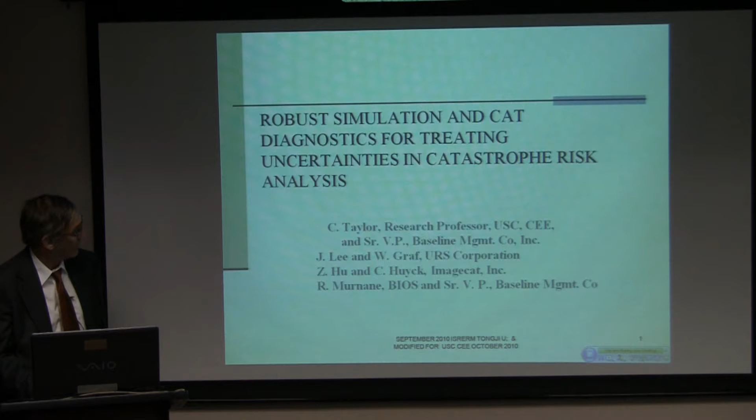So I wasn't unhappy about giving this lecture here because this is actually different. I didn't even think of this until a couple of years ago, and the reason it started was a question asked by Professor Trifunac many years ago. Let's see, how do I go up and down? Oh, here it is. Okay. The outline is, first of all, I'm going to define robust simulation. Secondly, challenges in selecting preferred and alternative catastrophe risk models, challenges to robust simulation itself, lessons from China, and then a summary.

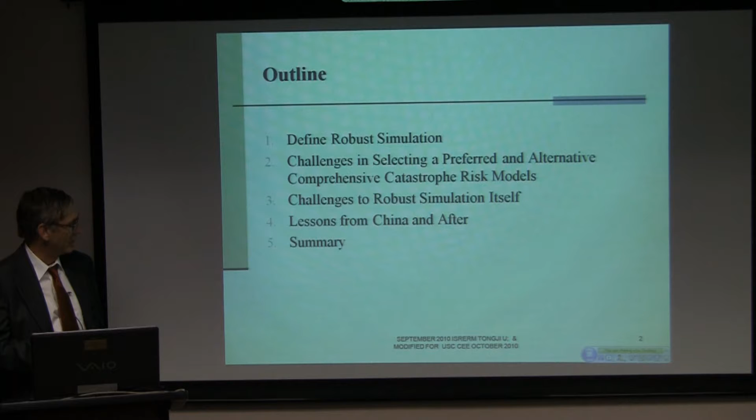But the question was raised by Professor Trifunac back in 2000, and he may not have phrased it this way, but I gave a presentation on how to define uncertainties given model uncertainties that you run through a big simulation program. If I had to redo it, I'd give a slightly different presentation, but it would be somewhat similar. And then he asked at the end of it, and you have to watch out for questions from Professor Trifunac, how do I account for what I call exogenous, this fancy term, alternative view models and views. And this has become a really prominent issue in earthquake and hurricane and other areas.

Is that the question you asked 10 years ago? I don't remember. I might ask you something else. For a primitive mind, could you clearly define the terms endogenous and exogenous?

Oh, endogenous just means that when you do a catastrophe risk model, which includes a lot of submodels, like exposure and hazard or peril, vulnerability, systems, macroeconomic, then you look at alternatives, so you can find out the best alternatives. You have a decision criteria and all of this. In these, you have submodels as well, and you can have an uncertainty.

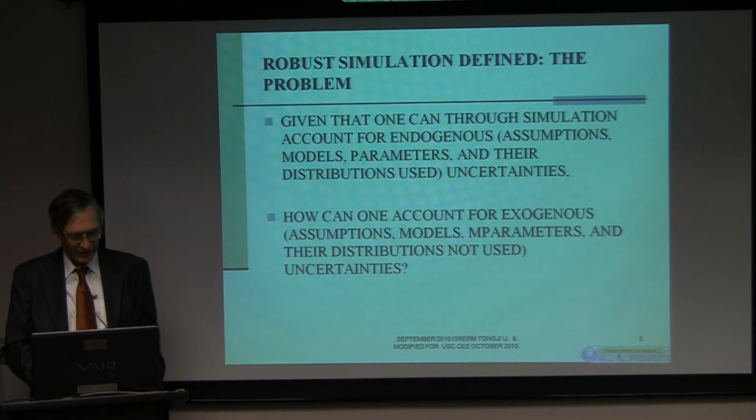So robust simulation employs simulation procedures. We're only talking about simulation. I'm not venturing into testing, which is a different story, to develop loss and gain distributions for a preferred model, that's the one I like, or you like, and coherent competitive models for the range of outcomes. And this range is developed to indicate uncertainties in what is currently known. This is a completely different view of uncertainty analysis, and I'll tell you why it arose in just a second.

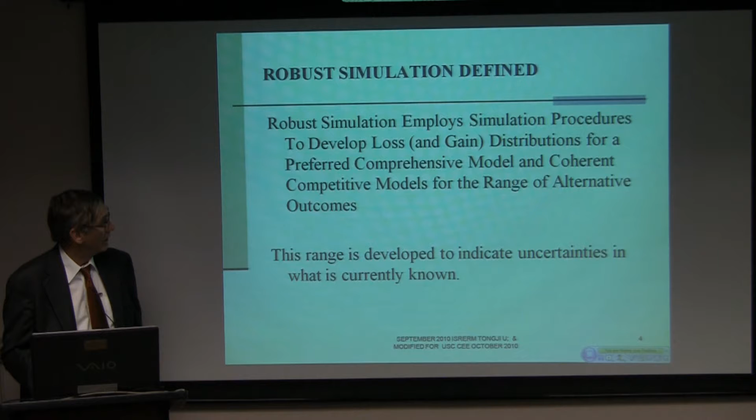So this kind of practice: I have a close friend, John Collins, who got an engineering mechanics PhD from UCLA, but he's now 75. He runs a big company of 60 people, largely PhDs. And they do missile risk analysis on all kinds of fancy things, and they do something like that in their procedures.

We had a presentation from Robert Lempert of RAND on how he did 100-year policy analysis, and he did the same thing. They used robust ensembles, is his expression, to get uncertainty. Can you imagine figuring out what's going to happen in 100 years? So climate change, climate conditioning, alternative insurance, reinsurance models for catastrophe.

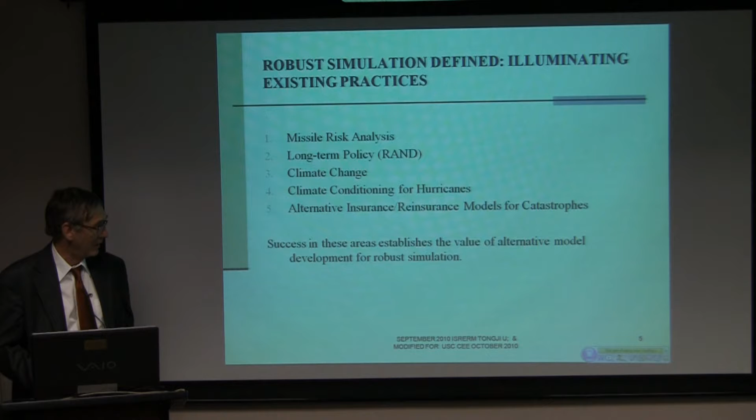And I have Rick Murnane, I mentioned in the first slide. He does a lot of work with MIT and Florida State on a lot of these issues. He's going to give a presentation in Zurich next year on the same topic for hurricanes. In California, we don't know hurricanes very well.

Okay. So here's the kind of model you're constantly seeing in terms of climate change, hurricanes, and so on. The results of the models are not precise outcomes. The results are a combination of outcomes from different modelers, and that's what is often presented as a result. This is from Kerry Emanuel of MIT. We could go over what it is, but you see the same thing on all kinds of diagrams in climate change.

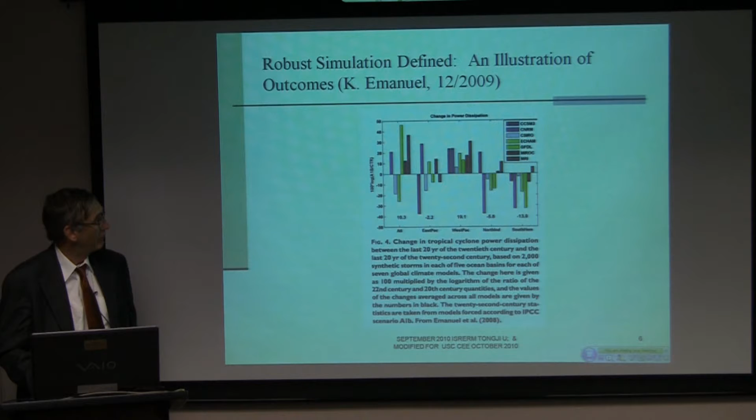And what this does is it starts to reorient our view of how one should think about what one is doing. Instead of having a monopolistic view of what one is doing, which is a good thing to have, by the way, it's a good thing to want to be the best, you should have a competitive view that while you're doing something here at USC, somebody else at Stanford is doing something else, maybe along the same lines, and somebody at Texas is doing something else. And it's good to have this kind of competition in science. So you have a competitive model as well as a monopolistic model of science and engineering.

And you have to have the wherewithal or resources to handle this model. So we're talking about really important areas. Earthquake tends to be one of those areas when there are national building codes and so on involved. So it's a very different view of science.

So these are the sub-models you have. Exposure, they all cause problems. Peril sources, peril propagation, path and distribution, facility vulnerabilities or fragilities, system vulnerabilities, macroeconomic outputs, decision procedures, stakeholder results. Each of these causes problems. You can have specialists on some subtopic for peril sources, and so on. And as things have developed over the past 40 years, the number of participants in this process has increased immensely.

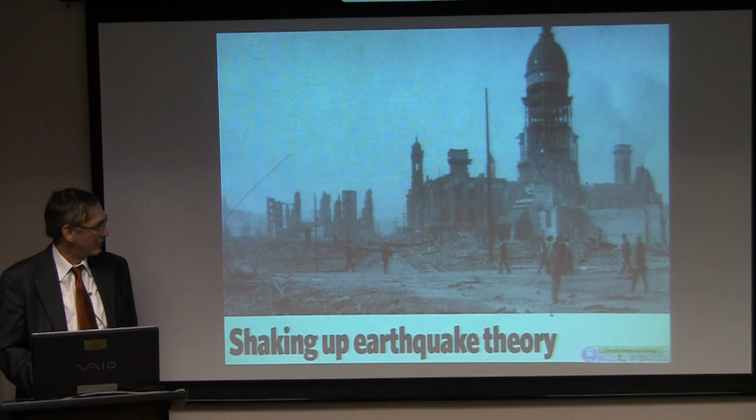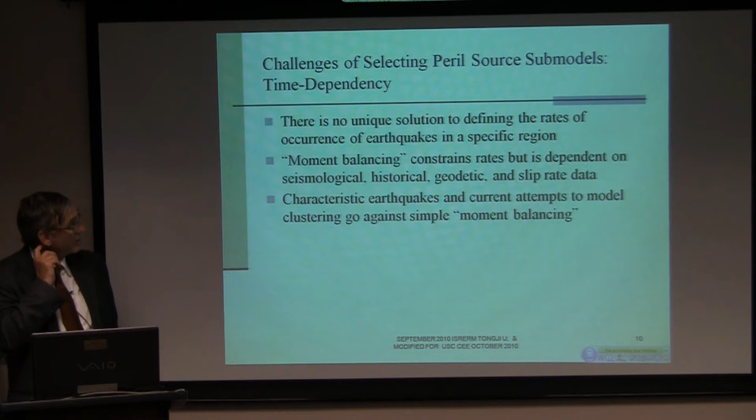So what is true about these models, and what makes it fit something like robust simulation, is there's no unique solution for defining rates of occurrence of earthquakes. There are lots of ways one can do it. One can do this or that or this or that. You can come up with a lot of different solutions on it.

Moment balancing, I used to really like this, but the more I think about it, moment balancing means that you've kind of got an energy budget. I think Professor Trifunac was using this back in 1985, something like it. But I used to like it because then people couldn't just throw in a big earthquake or increase the maximum magnitude of an earthquake without having it impact the whole regional system.

But with moment balancing, you've got three different theories of time involved in earthquakes. You've got clustering, which is being studied a lot now, where one earthquake causes another nearby. You have a cyclic behavior. Some people believe in what they call a characteristic earthquake theory, which is the earthquake occurs now and then its return interval is approximately 250 years.

And then you have a much more random theory, which comes out of UCLA, that you just have the so-called Gutenberg-Richter law that dominates everything, so everything's kind of random with some association of faults. These models are going to be discussed for a long time. One's not going to win easily.

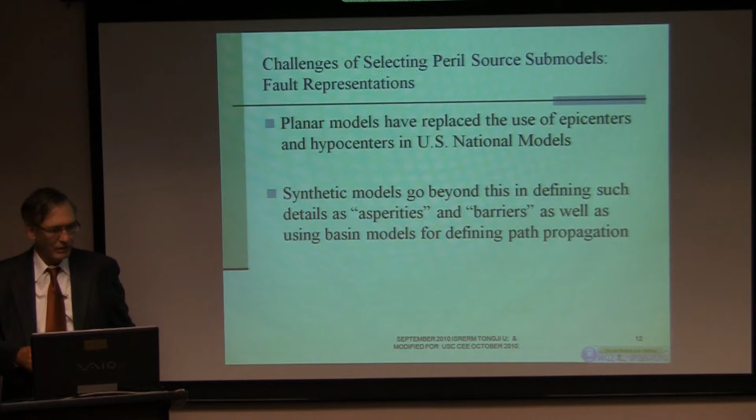Dynamics involve whether there are permanent barriers or not, and if the rupture goes through permanent barriers, does it go straight, follow the old mature fault, or does it go a little bit to 30 degrees or whatever? And this comes from Maria. There's no unique solution in defining the best synthetic model, and we'll see that in just a second. So what we have is a situation where we don't have unique models. We have different models. You have to have, as I say, resources to model these.

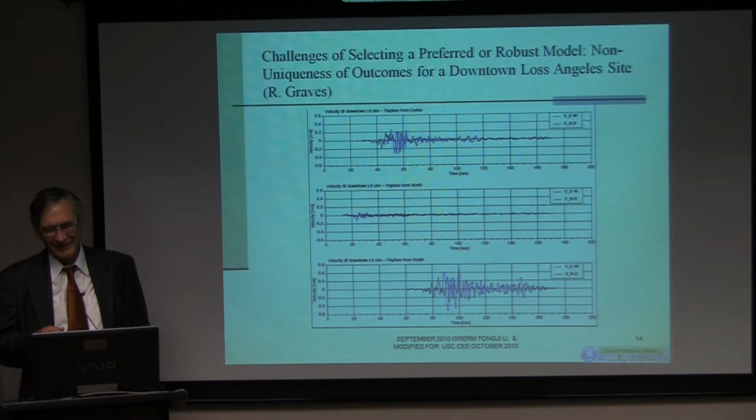Now, which one did they use in ShakeOut? Can anyone guess? You should know this. The structural engineers don't always like the results that come out. Always pick the biggest. Yes, thank you. Very good.

Okay. So next generation models have been developed by seasoned investigators given one database. There's a big database of maybe 3,500 records. But the probability given this database, all this evidence, did not yield a unique result. Now this is fascinating in terms of statistical theory and probability theory. This is not supposed to happen.

Von Mises thought that the more data you got, the more you'd get an exact answer at the end. And Bayesians sometimes claim when you have different investigators, eventually everything will converge. But it's not converging for these modelers because some are more interested in directivity, some have a different model of soils, and some want to emphasize how many data points from each earthquake you present, how to weight these differently, and so on and so forth.

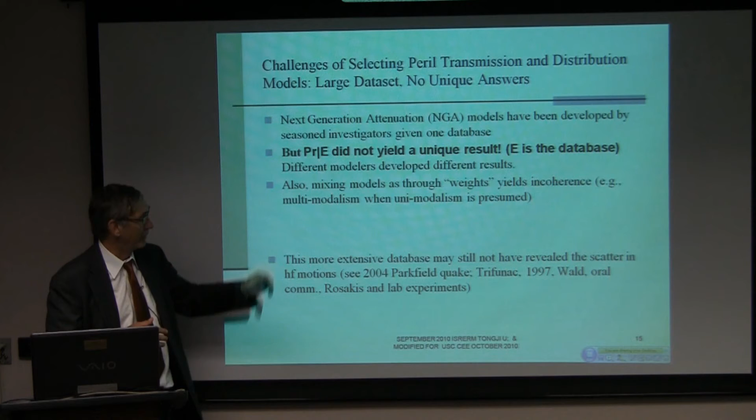So you have all these different modelers with different interests and different goals, and they're not coming up with the same answers. And it's especially bad in the Midwest. And also mixing models. I wrote the paper on this 18 months ago, but the reviewer of this paper was ill, and there wasn't oversight.

But mathematically, there's an old distinction that's been very popular in the earthquake area called epistemic versus aleatory. And it's just totally incoherent. But you can show that mathematically. But I won't try to go into that. It was just a mathematical presentation. The more extensive database still has not revealed the scatter in high frequency motions.

There might be not even the worst case, but the Parkfield event has a lot of high frequency motions. And Professor Trifunac can talk about this. In his 1997 attenuation model, he has a very high standard deviation for high frequency motions. And the current NGA models are much lower, extremely lower. And it turns out this is probably very critical for codes, especially low-rise buildings on rock. That's where it seems to make a huge difference.

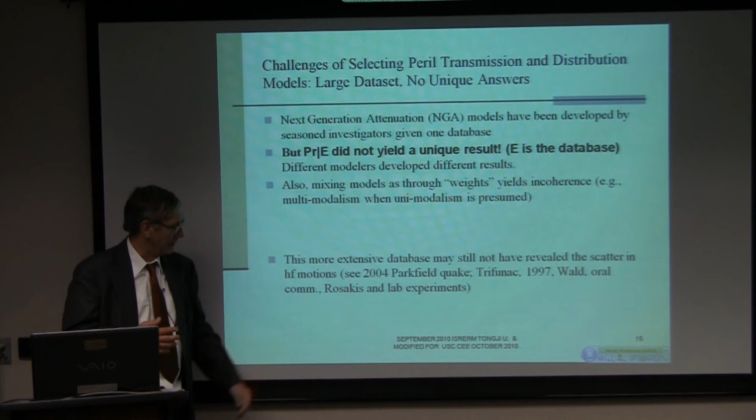Anybody who gets a chance should start looking at Professor Rosakis at Caltech. He's got some things on the web, so you can watch his lab experiments on rupture propagation for the earthquake model.

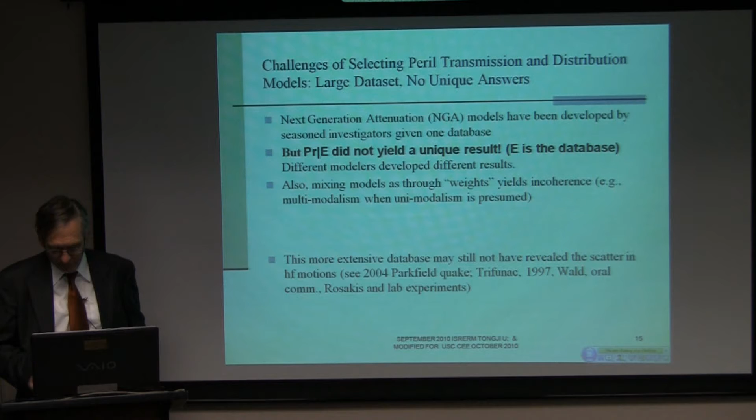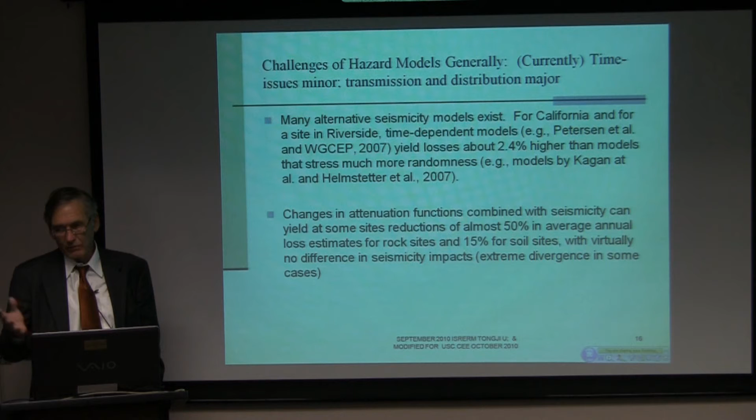Changes in attenuation functions, though, over time have made a huge difference, especially in high-frequency motions. So the losses are reduced 50% in some cases; this has been a big issue on the codes. Greg, have you seen this issue come up? How the codes have changed a lot, near faults, based on bedrock motions? So extreme divergence in some cases. So it's a major issue. Do you want to express your opinion on this? Okay.

So validation also is thoroughly required. Loss data are often proprietary, crude; uncertainties in strong ground motions and permanent ground deformations need to be accounted for, and so on. Validation procedures may be statistical. Still, some models may have almost no probability of being competitive. We studied one model from a famous federally funded program, a bridge structure model, and it had less than a 10 to the minus 9th chance of being valid. So you can rule out some models like that if you study them.

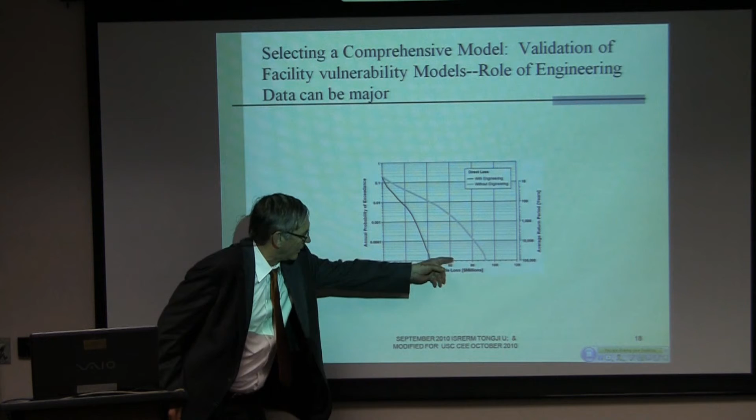And also you have a situation like this. You have a potential enormous contrast in whether or not your loss models contain engineering, whether you go out and make site visits. So this would represent a potential value added if all of your buildings were built as you stated them and there wasn't any uncertainty. And so the investigation can possibly reduce your loss estimates enormously, and that can reduce premiums a lot, and reinsurance costs all the way downstream.

Greg, how did you get to this curve? Oh, this curve comes from URS, but basically you change the uncertainty on your models depending upon how much engineering has gone into your models and the added information. Some of the structural people can talk about this, but you have different levels. You have an empirical model, where you categorize buildings by frame, height and so on. That's the very lowest level.

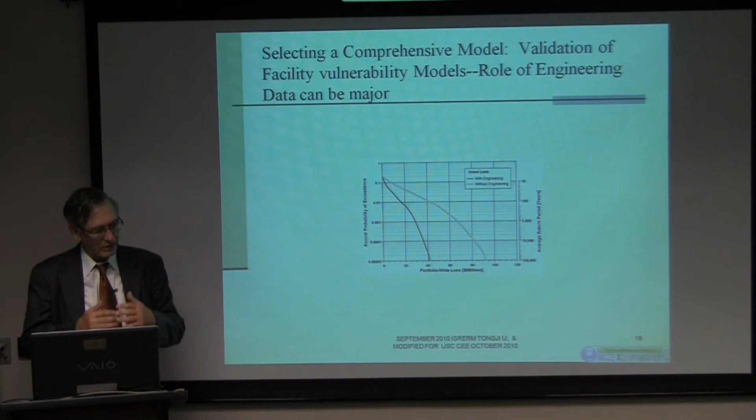Another level would be a site inspection. Another level would be a very simple analytic 1 degree of freedom model, and so on. The better you get, allegedly, the less uncertainty you have in how your buildings are going to perform. Okay. So

robust modeling yields these fuzzy outcomes from precise calculations. You don't have to have fuzzy set theory to do this; you could use it as one of your alternatives. And we know from well over 30 years of experience with stock markets and so on that decision theories do not always require a precise number. They can allow a range of numbers. You can make decisions without a precise number in your resulting analysis.

Fong Lu was at my presentation, and we just finished a paper at the end of 2009 on very complex decision theory, but there are much simpler ones: mean variance and Black-Scholes and all the offshoots of mean variance have had two criteria, the mean return on investment and the standard deviation or variance on investment.

Now, there's one big problem with what I've said so far. I'm assuming the law of large numbers, or probably the strong law of large numbers, in a lot of these discussions. I'm assuming that as you get enough simulations, this is where the predicament arises.

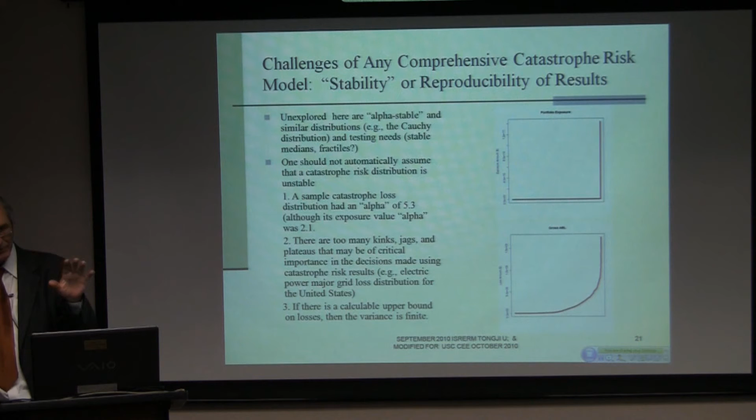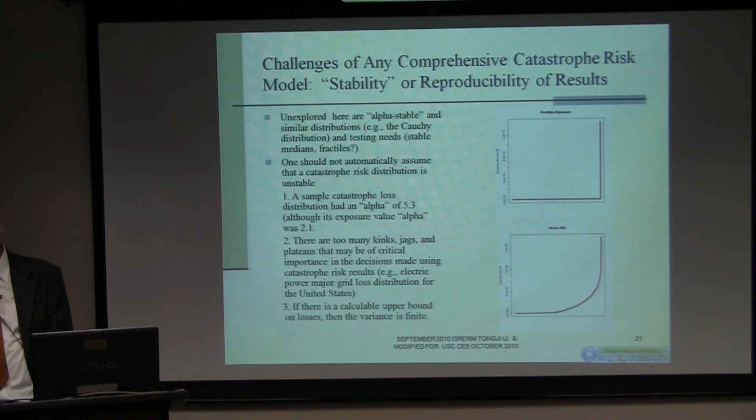You'd have to use reverse simulations to get that. I was reviewing a paper that had a similar issue, where they maybe had a 10,000-year return interval for failure of this building, but they were just using forward simulations and weren't getting it. So they didn't see that you actually had an upper value, and when you don't see it, it looks like you have infinite variance. It looks like your structurally engineered project is always better than an inferior design, even under those circumstances, when in fact, when you hit that 10,000-year limit, the other design is better because you've spent more money. Somebody didn't notice it because sometimes you have to use reverse modeling to get there.

So you seek the most divergent competitive models. This is what I've been suggesting to USGS. They've been trying to mix and match models, and sometimes it's like mixing oil and water. They just don't mix. They have different motivations, different parameters, different databases. Place the burden on those with alternative models. Deal with how to communicate risks in terms of ranges of outcomes. Rethink the idealizations—when this starts to fail, you really have to start rethinking what you do with axioms and things. You have to be careful of emphasizing mathematics at the expense of reality.

The law of total probability has a hard time applying to this because you're talking about opinions. Opinions are often influenced by the group, and you don't ever know that you've got all the opinions. The NGA modelers do not have all the important opinions on the attenuation functions, and there may be some really bright kid out there somewhere who's got a better model. There's 7 billion people, and if you divide by 10 to the 4th or 10 to the 5th, you've got a lot of really smart people. So my point is that it's very hard to claim that you can divide the world into these nice partitions of opinions, which are all non-overlapping.

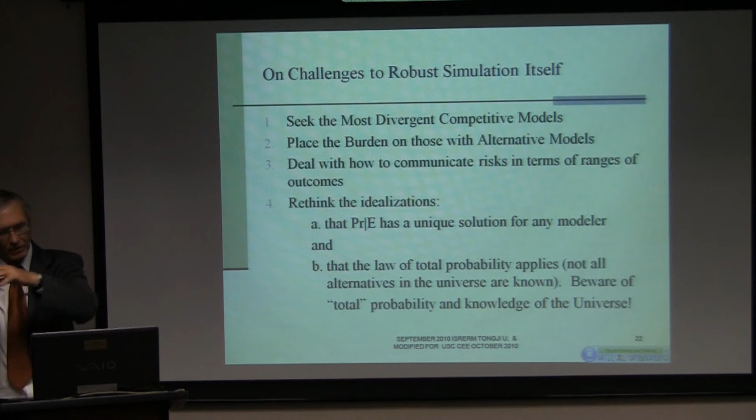So, lessons from China. One lesson I learned from China was that there are some models that require days and days—these would be submodels on individual structures, geotechnical sites, or things like that. The supercomputers might be running for 6 or 7 weeks, so you have to simplify these. The way to think about simplifications is to think about them in terms of developing systems and emphasizing mechanisms for those that are really hard. But you also can pre-process a lot today.

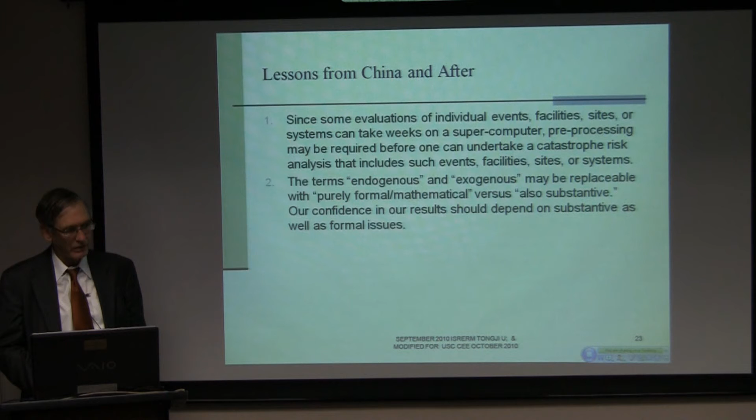I think the terms endogenous and exogenous are as ugly as aleatory and epistemic. A better way to think about this is you have purely formal or mathematical ways of developing confidence intervals, and this is more substantive—you're actually looking at alternatives to your view. My view is this is a much more mature model of what we actually know. It gives you a range of what we actually know, in spite of the fact you may still prefer your own model. It's practiced in many disciplines that are very active and important.

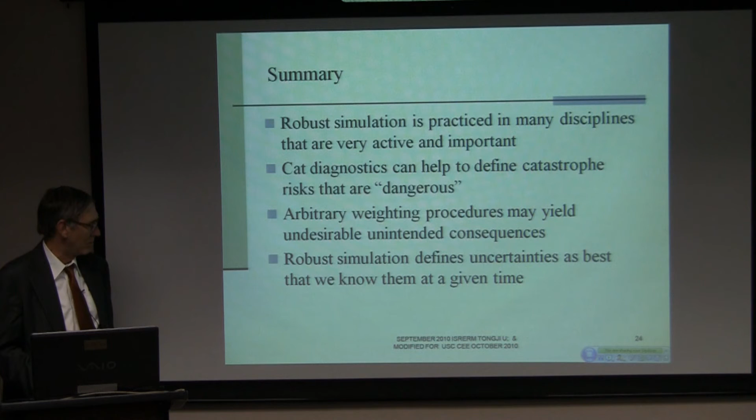CAT diagnostics help to define dangerous distributions, which is why this whole problem arises. The 1 over square root of n rule—you're not getting anything out of that rule. Arbitrary weighting procedures may yield undesirable, unintended consequences. That's what's true of the epistemic-aleatory stuff. You get multimodalism when you assume unimodalism, and worse stuff than that. Robust simulation defines uncertainties as best we know them at a given time. So I want to thank everybody for just paying attention. I hope it made some sense. Any questions?

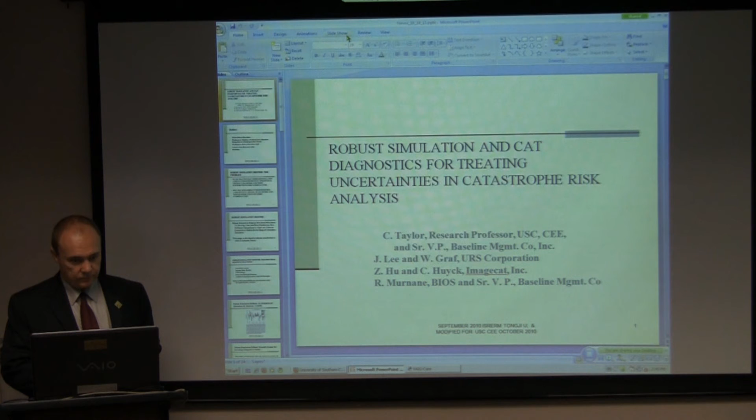Something was predicted, or could be post-facto predicted as if we didn't know the outcomes, and then we compare that with the outcomes so you can test some of these ideas. Test robust simulation like this? Yes, there's all kinds of testing that goes on all the time. Have you done any, or can you suggest or illustrate a test for us?

We tested this bridge structure. Let me give you this example. The bridge structure case, we actually had to run an enormous number of simulations given the models to see if the number of collapses as predicted could be verified or invalidated.

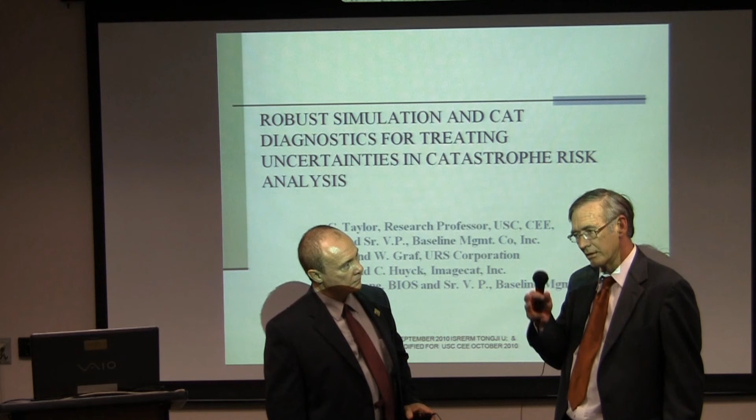There were about 43 bridge structures estimated to collapse, and in the actual database we had, there were 9 in Northridge. That was the exposure we dealt with. We had to figure out a way to come closer to 9 by changing the parameters. It was a fairly simple model, but we had to run loads of uncertain distributions on the Northridge earthquake through the bridge structures just to test. We didn't just test based on MMI or some best estimate, we tested based on a whole uncertainty evaluation.

That's one test, the Northridge earthquake. But for example, I don't know if it's called an overpass, when you go on the 5 there's an exit with a huge arch and circular thing that goes to 14. That collapsed in 1971 and almost exactly the same way in 1994. So if you were to use that as a model and analyze the design criteria, everything that goes into the model, and see if you can predict '71, and then what was done afterwards, could you have predicted 1994? I'm looking at a recurrence of catastrophic events on a model that is more or less well defined.

Well, from a structural engineering standpoint, this tends to be fairly easy. You have all kinds of concrete buildings throughout the world that just failed in fairly moderate earthquakes. It's not really hard to make predictions like that for some categories of buildings. Something like Haiti is probably predictable if you have the earthquake model. So I don't think part of what you're saying is hard.

It's not the question. The question is, can you estimate that precisely in your validation process? What you have is not just one earthquake, you have other earthquakes and so on, so you have to spread it around, and there isn't a lot of data outside of the Balkan region, and maybe China, maybe Tangshan, to do that kind of stuff. So yeah, the answer is you can definitely have lots of tests, experimental tests as well, I think those are fine.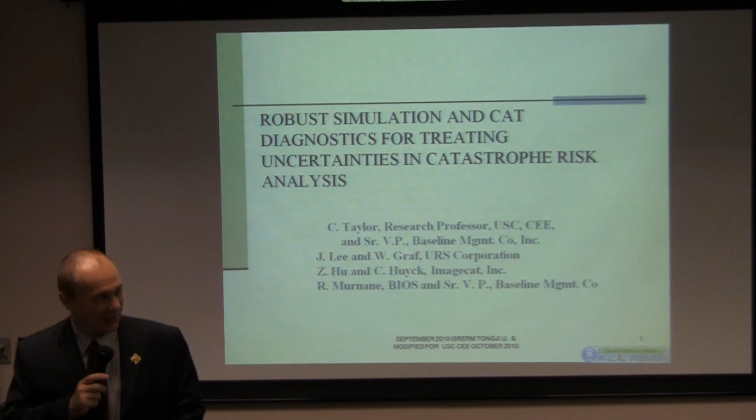Sorry, Michel. I'm not part of the audience, right? You're part of the audience, the rest of the audience, should I say. I get the message. Any questions for our speaker? Well, if not, since I'm at the microphone, I'm going to ask one.

Now, have you been involved in the ShakeOut exercise? Here we have major simulation efforts. We simulated, I believe about 2 years ago, a rupture on the southern part of the San Andreas Fault. And then we looked at all the consequences of this rupture. There have been a lot of simulations, from the faults, from the propagation of the waves from the faults, to the impact on various infrastructures, gas, water. We looked at the fires and so on.

And some of us are concerned that it's been handled mainly by seismologists, not by engineers. So I'd like to have your input on what went right and what went wrong in these simulations. Can we trust them? Do they give us the right picture of what we could expect from a major rupture on the San Andreas Fault?

Well, just my opinion. My opinion is the function of ShakeOut is to stimulate interest in earthquakes and support for, to some extent, structural design, but largely for studies in seismic hazards, and also to help in some emergency response management where you look at maximum outcomes. And there are some engineers I know who have helped on the project. And I've shown you what Robert Graves did with 3 different sites.

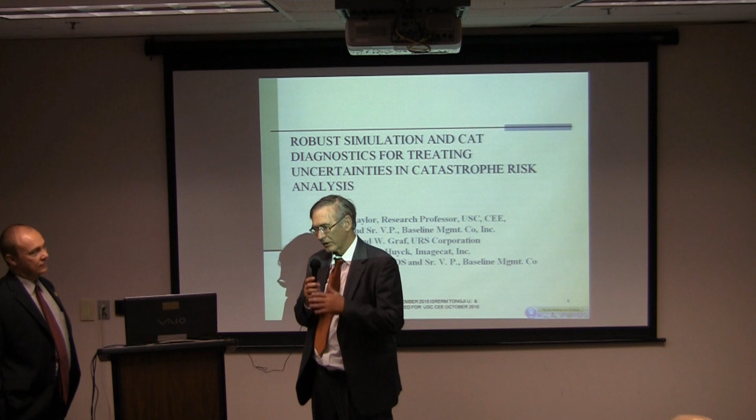I have a guess what they did on bridges. I think Caltrans was involved. At first they had a lot of bridge failures and so on. But I think it's a useful thing, but we have to watch out for hype too. So it's useful. Okay.

Yeah, it's a very relevant question. Actually, Lucille Jones, who is one of the leaders of this ShakeOut, is visiting USC today. She was meeting with Dr. Synolakis to include the effect of tsunamis. So we now include the evacuations of the coastal areas, following tsunamis which may hit our coastal margin. So that's something which is being debated now.

And I think USC is going to get involved in the ShakeOut. If you don't know what the ShakeOut is, it's a major exercise led by, I believe, SCEC and USGS, basically trying to simulate the effect of earthquakes to prepare populations before it actually happens. So we know what to do, how to respond in case of an emergency. And it involves quite a lot of people. Last year, it was said that more people contributed to this event than people voted in the state of California.

Of course, what they didn't tell you is that a lot of students, the children, were involved, and those usually do not vote because they aren't of voting age. But okay, so anyway, any more questions? Yes.

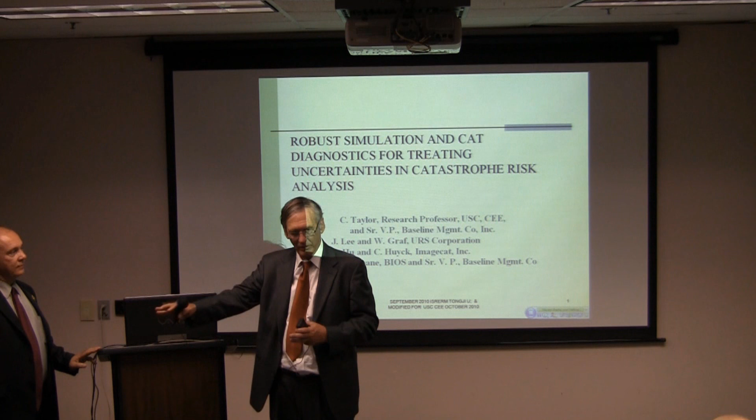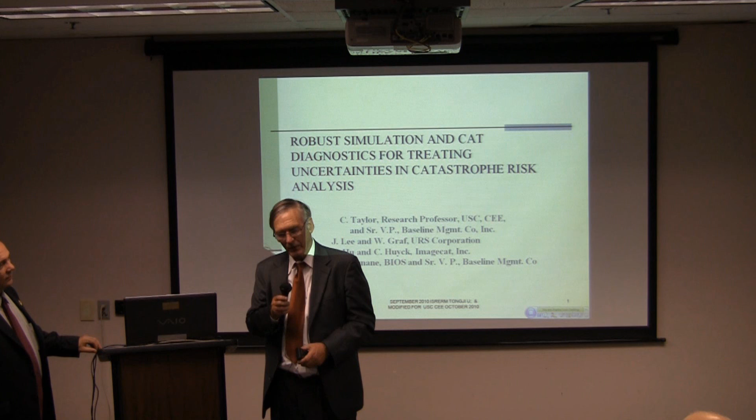So you can see this in some of the discussions, but what you should do is allow each competitor to outline coherently his own view, all the way across the board. And that way, at least you have some coherence there. You're not mixing very different kinds of entities together. And that's what's happening, I think, in climate change, and with hurricane forecasting, near-term forecasting. It's happening in all kinds of areas. So you're actually allowing more coherence. You're not bringing in all this incoherent stuff. That's all I'm saying.

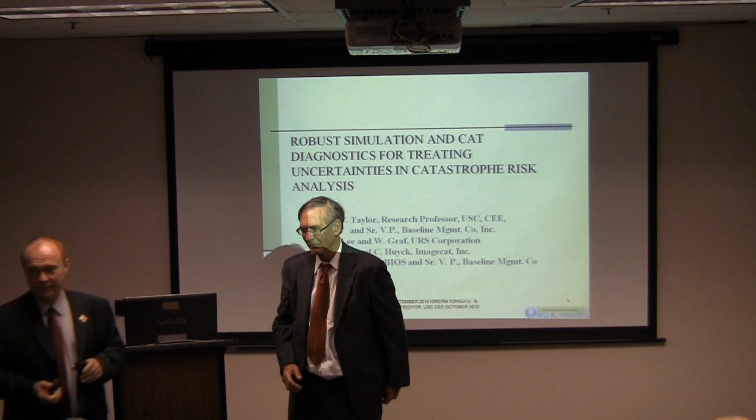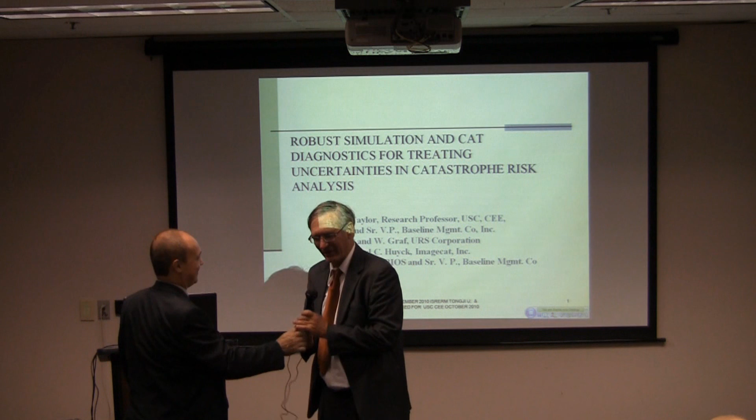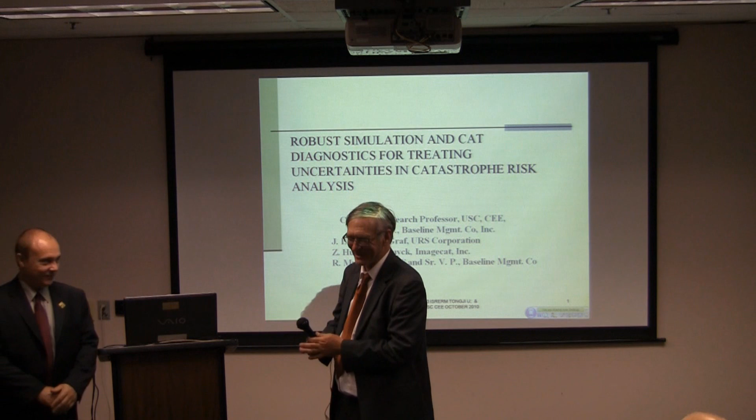These are mathematical inconsistencies. There are serious reductio ad absurdum arguments against the NGA process, but that's okay. The question is whether coherency is something we should follow. Because you have a room full of experts, and each one has a model, and if you average them out, you're actually throwing out one of the very good models. Exactly. But the other criterion for science, this being really simple now, is fruitfulness. So you don't want to throw out fruitful models just to emphasize coherence. We're just teasing at this point.